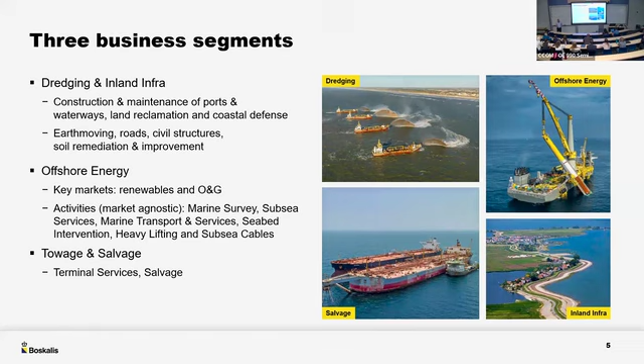2023 results give you an idea of the size: revenue about 4.3 billion, EBITDA about $1 billion. Net profit - dollars or euros? Those are euros, so multiply by 1.1 to get dollars. Net profit of about 600 million euros, so about 660 US dollars million. Net financial cash position - this is interesting - 500 million, so roughly almost 600 million net cash position. That's if you want to take over somebody, you have the money.

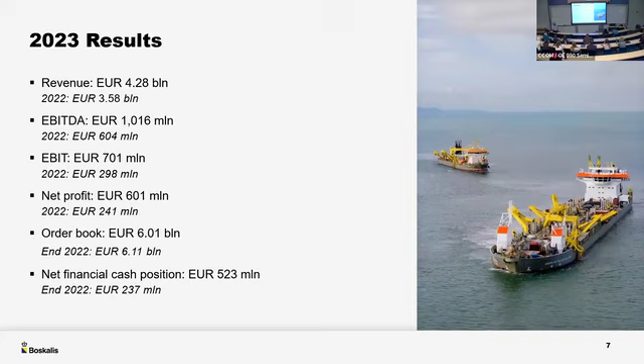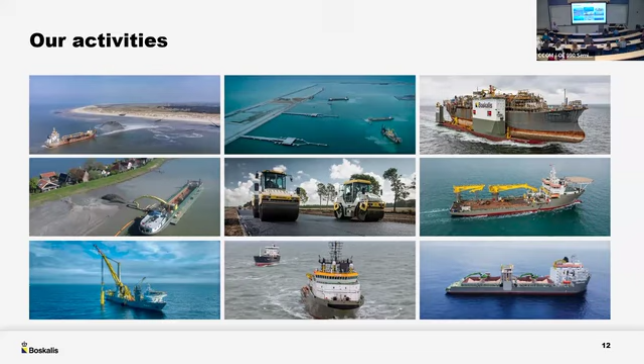Let's go a bit into the dredging action. Three of our vessels here.

It is a global capital intense business with a high barrier of entry, because a modern dredger vessel costs about $200 million, slightly under 200 million euros. So if any of you thought, well, I'd like to be in dredging, let me start a dredging company, you're going to have to build one of those vessels. That's a high threshold.

We construct maritime infrastructure, ports and waterways, climate adaptive solutions. There are pictures later of things we do in the Maldives. Land reclamation - obviously there is a shortage of land near the coastline. One of the projects we're currently doing is building a new airport in the sea in Manila. We've added something like 20% to the total territory of Singapore over the years, expanding the land into the sea. We've done a lot of reclamation in the Gulf, in the Emirates. And we do inland infrastructure, but that is mainly in the Netherlands.

But we have the ability, and occasionally we use that, if we develop a port somewhere and the people want a road to that port, we have the capability to also include the road in our bid. I haven't done any railroads yet.

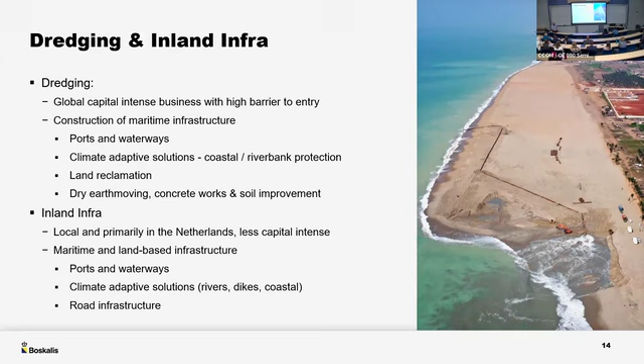Track record of selected projects: Manila International Airport, Gulhifalhu pictured below in the Maldives, where we are actually reclaiming land and heightening it, because sea level rise is a very bad idea if you live in the Maldives, where roughly the land is about 50 centimeters to 2 meters above the waterline. They are really worried.

We're currently building the Fehmarnbelt tunnel, a connection between Denmark and Germany. That tunnel is an immersed tunnel, 18 kilometers long. We're providing all the dredging works there to submerge that tunnel in a ditch. It's an interesting positioning challenge, because tolerance between two elements closing on each other is 25 millimeters at 40 meters of water depth. It's a bit challenging.

Singapore extensions are to come. We were the lead contractor when Egypt decided that the Suez Canal needed to be a two-lane instead of a one-lane connection. We did that, but we had to do it in one year. It was a challenge.

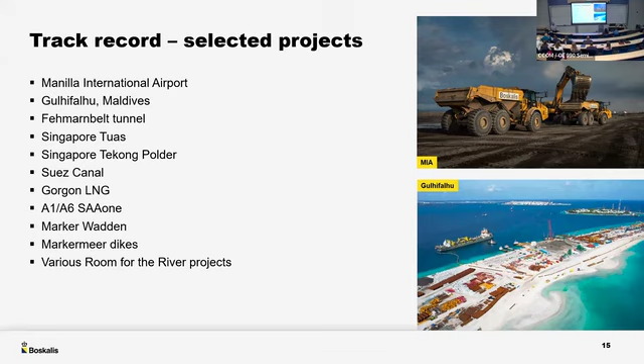And some other various projects, I won't go into too much detail. Here you see some pictures of the dikes we're reinforcing - that's work in the Netherlands. A large reclamation project in Singapore, that's what you see here. This is where the tunnel is going to go, and these are concrete factories that will build the tunnel elements. They build the elements, tow them out, submerge them, and connect them to each other. That way it's an 18 kilometer long connection.

I always had a question about this: when you build a tunnel like this, are those segments placed on top of the seafloor or buried beneath it? You dig a trench, put them in, then add a layer of rock so you have a solid foundation at a certain height. Then you lower them into the trench, fill up the sides, and put some cover on. So the overall seabed height stays close to what it was originally? Yeah, that's the idea.

Usually you build that through a shipping lane or something, and you don't want to reduce the navigable depth, so the end rock that's on there is even lower than the surrounding seabed - it's a pretty deep trench you have to make. That's a challenge because usually the current is going perpendicular to your trench trajectory. So you're making a trench and you don't want fluid mud in there, because you need to put rock on undisturbed soil for a sturdy foundation. Meanwhile all the sediment is being brought in - that's why you need to produce these elements quickly, because if it takes too long you'll get sediment buildup. Then if you try to lower the element onto the bed, there will be mud in between, and it'll keep moving. It's a challenging business.

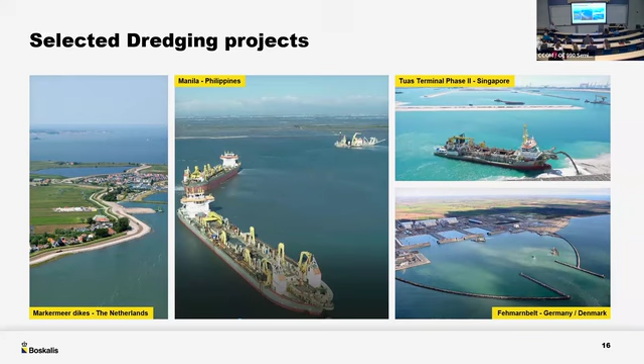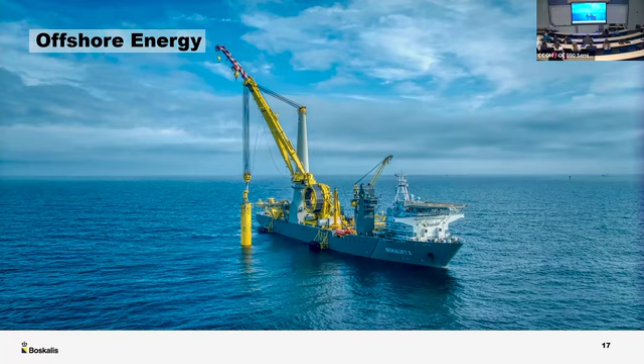Offshore energy. Here you can see a little bit better. That's the Bokalift 2, that's a large vessel. There is a slide on how we make that. That's interesting.

Markets and activities: key markets, renewables and oil and gas. All these assets we have are a mix of contracting and services, and it's market agnostic, so we can use those assets, those vessels, both for oil and gas and for renewable energy. That's why we always talk about an energy transition. It's a process that's going to take time, some people think it'll be finished by 2050, others think that's going to be very challenging to achieve. So there is a transition.

In between, you will still have to maintain oil and gas facilities, and oil and gas facilities will need to be built. But at the same time, you want to be able to install renewable energy. So our assets are geared to being workable, economically workable, in both segments, and we're pretty successful in that.

So we do a number of things: we do transport services, heavy lift, as you saw, the monopiles. Marine survey is what we call marine survey, geophysical, geotechnical - two of our subsidiaries do that, Horizon and Gardline, part of our group.

We install cables, subsea cables, so export cables to get power from an offshore wind farm to the shore, but also infield cables connecting the individual monopiles to a substation where it's combined and transported and then exported to shore.

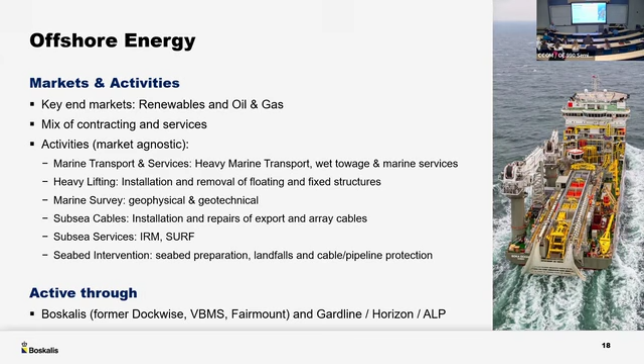We've been involved in over 130 wind farms. There's no other company in the world that can claim that - we're pretty proud of that. Lots of examples, other things we did, Aasta Hansteen, topside float over. I don't think there's a picture there.

When you first set up piles and then you float over a complete production platform, this is something we do. There's pictures of that. We install FPSOs, do the anchoring pattern, they call it the jewelry. Install that, but also if an FPSO is end of life, we will remove it. Also an activity we do.

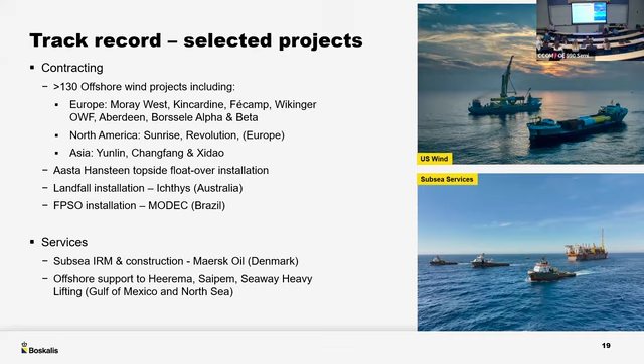And we do services, so that's all contracting. Services is subsea IRM maintenance, offshore service support to Heerema, Saipem, Seaway Heavy Lift, you name it. That is the support vessels.

Here's some projects. Electrification of a gas platform, that's a production platform that used to get its power from burning fossil fuel. The Dutch government didn't want that anymore, so we ran a cable from the shore to the platform so that they can make the platform electric power operated, so that they don't emit CO2 anymore. Although they still produce gas, their own emissions has gone to zero.

And we do subsea services. Park your boat against an existing platform installation. Send the divers down to do maintenance, to clean the legs, to check for damages. That sort of thing.

Salvage, very important. Very high PR value, because these things tend to be in the news. Some survey involvement, not much.

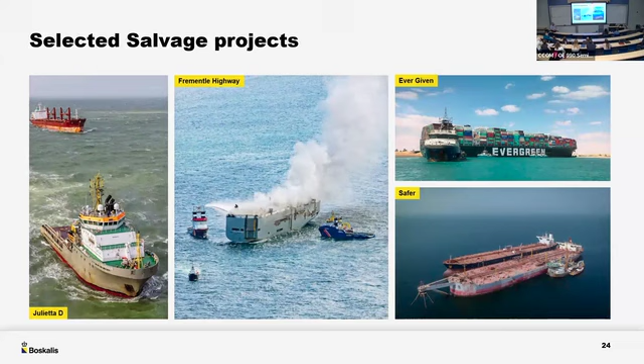So what drives this whole business? This is interesting to know. Population growth and increasing wealth are two givens. That's happening. There's no way to stop it and nobody can influence it.

What happens then? That leads to coastal urbanization. People want to live no more than, 80% of the people live within 50 miles of the shoreline.

There's growing world trade because people need stuff. They need food, they need water, they need refrigerators, they need air conditioning, they need Starlink internet. That has to be shipped there. People order stuff from AliExpress because if you order electric Christmas candles with batteries in them, it's cheaper if it's brought to your door than if you go to a local store and buy the batteries separately. So there is an immense amount of stuff being shipped around the world, and we create ports.

Energy demand is rising. No matter what people say, there are only a few places in the world where you can live without energy. Probably where we are now. If you did not have energy, you could not live here. You'd simply freeze.

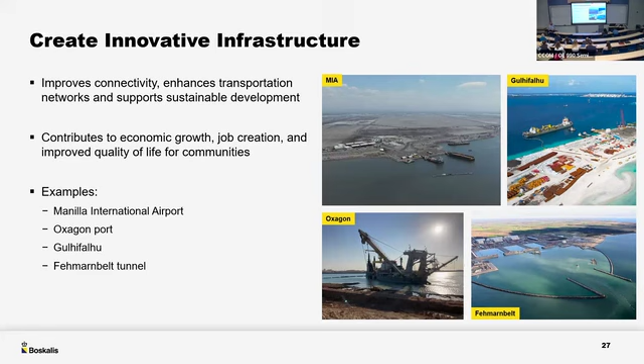What you see here is a hinge, called the upending hinge. You have this huge monopile, 10 meters in diameter, transported horizontally. So the crane picks it up from the deck and puts it in the upending hinge. Then you hold it by 2 points, release 1 point, and start upending it. It shouldn't fall down. So this whole contraption is there to support this enormous pipe to go straight.

So it stabilizes the monopile, 3,000 tons, holds it steady, and then slowly the crane will lower it onto the seafloor, because that's the critical point, when the monopile hits the seabed. If it's on an angle then, it'll keep going on that angle, so you won't get it straight.

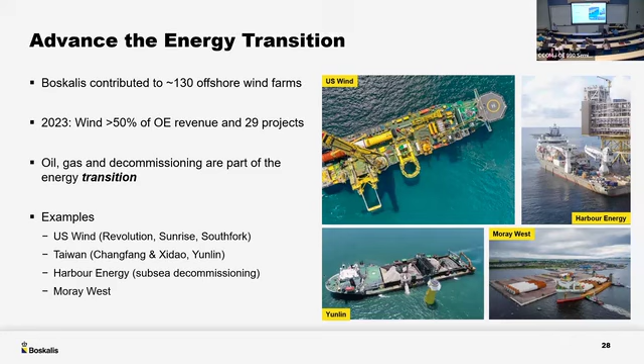How much do you guys do your own in-house research on improving technologies, like optimizing a ship, versus doing analysis and making contracts to bid out for the best possible things, as opposed to your own research? I can think of thousands of things where you'd have your own research process. Yeah, oh yeah, we have a research department, and we have what we call central fleet support.

I don't know where that is, but let me click through a bit. Why isn't this going on anymore? Oh. This is what we do.

This was an abandoned drilling vessel, the Jack Ryan. We bought that and we recycled it. It became the Bokalift 2. So we took an existing hull, got everything off, and then our own in-house engineering departments made that design.

We put some extra parts here on the side, you can see here, for extra buoyancy. Put the crane on and designed all those tools ourselves, so a hell of a lot of research went into that. And we made from that vessel, which was dirt cheap because it was destined to be scrapped, a state-of-the-art wind farm installation vessel.

Two main advantages. One, it's cheap because the hull already exists - you use a lot less steel, and steel at the moment is a premium. The second is time to market, because if you start from scratch and build a vessel like that, it takes 4 years; the conversion only took 2. So we have the vessel available quicker, and it's ecologically very friendly because you reuse stuff rather than build new.

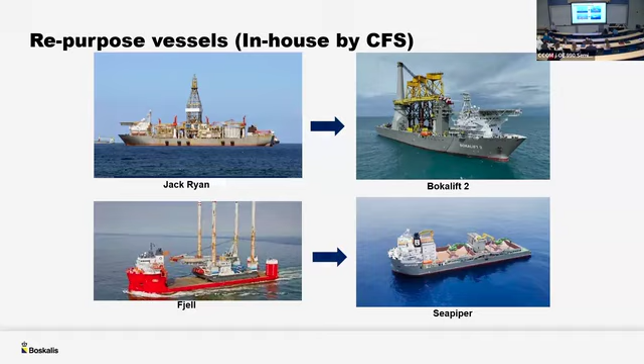Okay, we talked about this. We talked a little bit about human excellence. It is about internal mobility, diversity and inclusion, using everybody that is available in the world because there is a shortage of capable people. And not just getting them in, but also keeping them, developing these people. It is about people.

We invest a lot. We used to be on the stock market exchange. You could buy part of us. A Dutch investment fund, HAL, which is the Holland America line, which is not the cruise line, but the previous owner of the cruise line, and they sold the cruise line. They've been our majority shareholder for something like 30 years, and they decided to take us completely off the stock market.

And they sanction our investments. We were planning to invest in 3 years, 1.25 billion. In 2 years, we were at 1.15, and we're going to spend another 600. And they fully agree. The only thing they say is, do you need more money? It's a pretty good owner that has us, and they have plenty of money. They want to do something useful.

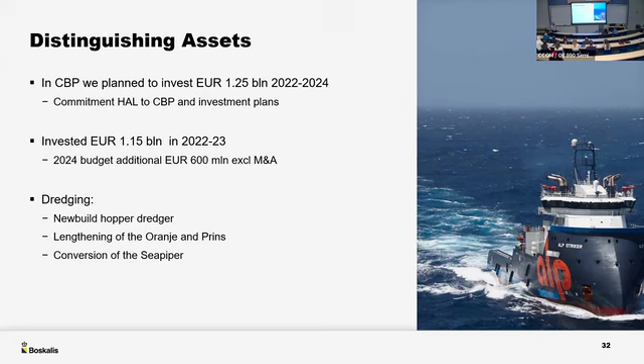Well, we talked about this. A little bit about good stewardship. It's corporate driven, responsibility lies with the board. But there's also things like safety, carbon emissions, that's typically something the board decides on. But on projects, we apply good stewardship. It means biodiversity, ecosystems, because that's a direct interaction with projects. Social and community impact. Emissions is an increasingly important topic.

Touch on it just a little bit. You've probably heard about scope 1, 2, and 3. Well, we can deal with scope 1. This is direct emissions. You can imagine there is at the moment no substitute for diesel engines, so 99% of our CO2 output is generated by the fuel of the vessels. But it's in our control. Scope 2 is our indirect emissions from purchased electricity, the offices, that sort of thing. That's also in our control. We have solar panels on every single building. We have 255 electrical car charging points at the parking facility.

Scope 1, scope 3 is more difficult. It's your suppliers and it's your client usage. Now we can influence what we buy. If we buy asphalt or steel, then we can influence that and try to minimize it as much as possible. Client usage is a different thing. The environmentalists are trying to push us to say, well, you can do something about it. But if the Philippine government wants an airport, it's a bit difficult to say, okay, Boskalis, you're going to be responsible for all the CO2 emitted from the use of that airport. If we build a road, it's even more clear.

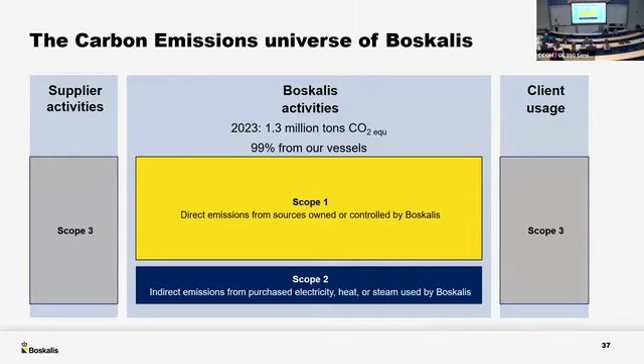If that road is used solely by electrical cars, there is no emission. But if it's driven by diesel owners, then it's different. So for now, we don't really have an answer to scope 3. We're trying to decarbonize the maritime industry, but we don't make diesel engines. There is no real alternative yet. We're investigating, but it's not there yet. And if there is an alternative like LNG, hydrogen, whatever, then that has to be available globally. So there are difficulties there, but we're working on it.

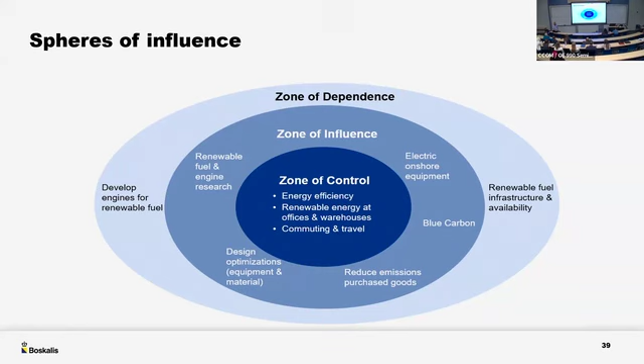It's basically 3 zones: zone of control, something we can do something about; zone of influence, where we can try to influence others to, and subsidize them in a certain way to make the cleaner choice. And then there's the zone of dependence, like we don't invent engines. We're looking into nuclear, but it's difficult. But it might be an option, especially for things we do that require immense amounts of energy. So we're looking into that.

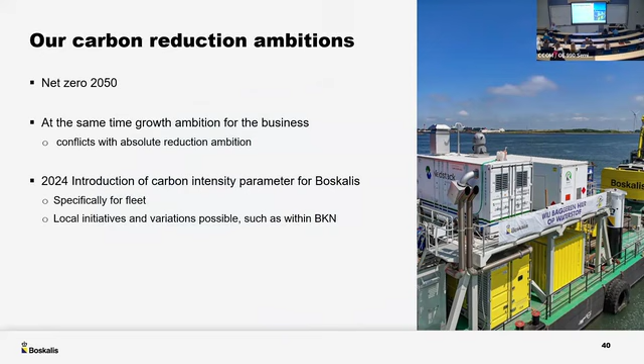Our carbon reduction ambitions, net zero 2050, depending on others as well. We have a parameter and we want to reduce our emissions by 10% by 2030. That is our relative emission, because we also want to grow as a company. So it's not the absolute, it's an index.

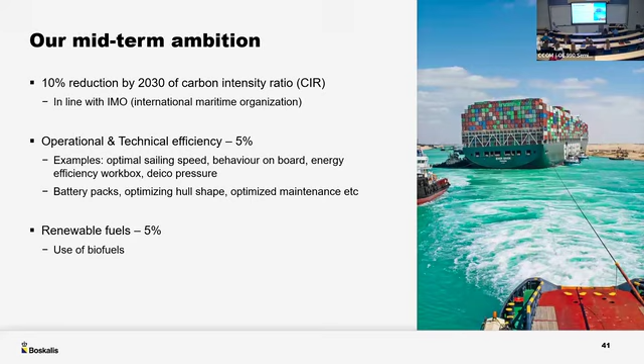5% has to come from operational efficiency, and 5% from using biofuels. We think we can achieve a reduction by 2030. We're working on that, although people see us as the great polluter - we're doing whatever we can to stop that. As you can see here, that net zero excludes

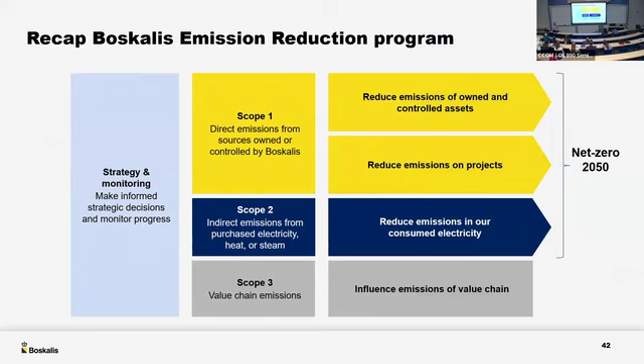scope 3. If your business is building airfields,

We've got battery packs on our dive support vessels, because if you use battery packs, the propulsion is diesel electric. If you're on DP, especially in high seas, we can now take 2 of the 4 diesels offline and run it through the battery because of the peak performance that the DP has to give, and that can be compensated by the battery. Saves a hell of a lot of fuel.

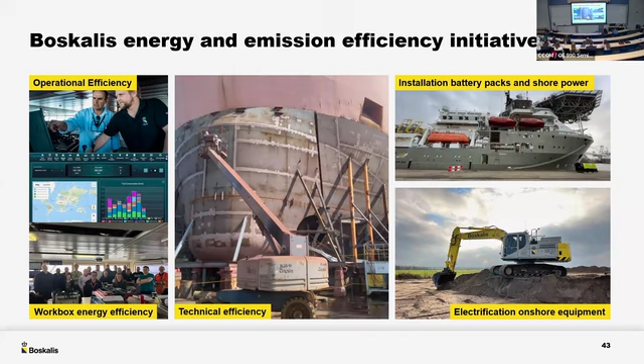We have electrification of onshore equipment because there it's easy - simply run a cable. Preparing for the future, all-electric dredger. We are building a dredger at the moment, a big one, that can use methanol. We do have hydrogen power - we are experimenting.

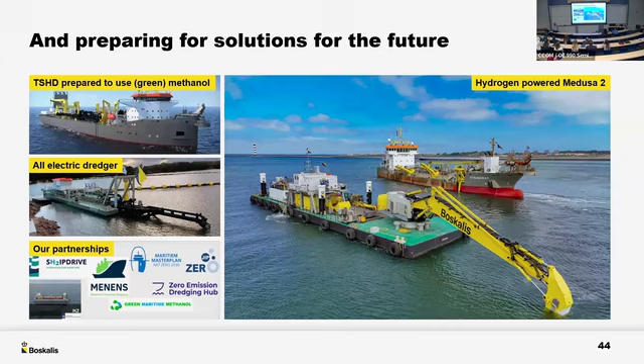Biodiversity - we're part of EcoShape, which is trying to do what we call building with nature. So if you're disturbing the soil, make something out of it that is a better habitat than it was before. We're trying to do that, and we succeed in mangroves, in placing artificial reefs, that sort of thing.

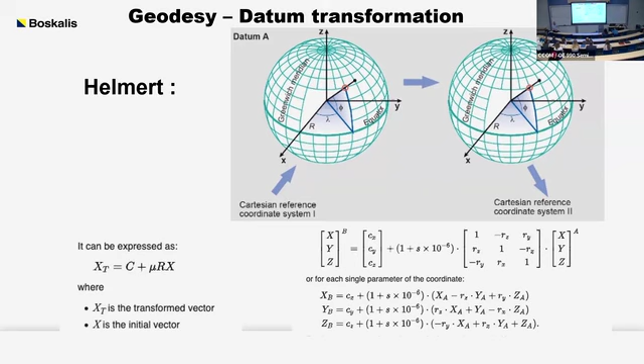Now we try to work with GNSS. Every country has its own system, so you have to transform it, and you have to check and double check and recheck again. To give you an idea, every single British port has different datum transformation parameters from ITRF 89 to OSGB - they're adjusted per port, it's not something national. So this is important - geodesy is important. It's important to avoid that.

That's a nice anecdote - this Fehmarnbelt tunnel is 18 kilometers long. In the beginning, the client thought, well, let's split this scope into 3 parts. So we have a scope that makes the trench, then a south contractor and a north contractor, and they're both going to build 9 kilometers of tunnel. They're going to meet in the middle with a 25 millimeter vertical accuracy.

Just before they handed out those contracts, they decided it might not be a good idea to try and have that connection 9 kilometers offshore, 40 meters down, and expect to be within the 25 millimeters. We said, why don't you flex the 25 millimeter? Well, they couldn't, because the whole tunnel has roads but also a railroad, and the train with the electrical wires on top need that space. If they were to relax the tolerances, they would have to build the tunnel higher, and the cost in additional concrete and rebar would be immense - they wouldn't be able to bear it.

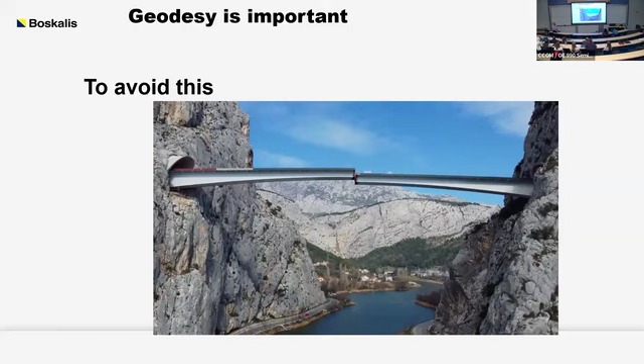That's why you need a survey department. That's what we deal with every day. Very high accuracies. And not a lot of people realize this. You lot will.

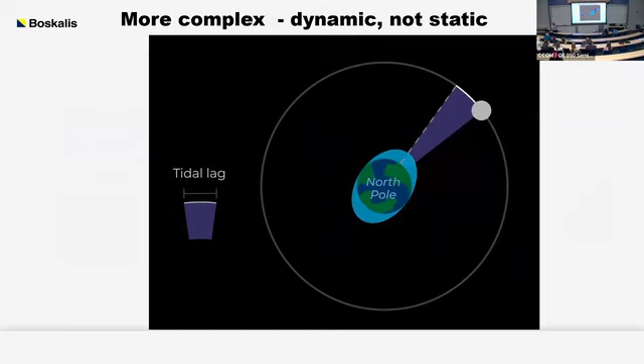That water level isn't static, is it? You have something called tide. It moves all the ways. It's weather dependent, it's dependent on the moon, it's dependent on anything. It's dynamic. Even the sea floor is dynamic.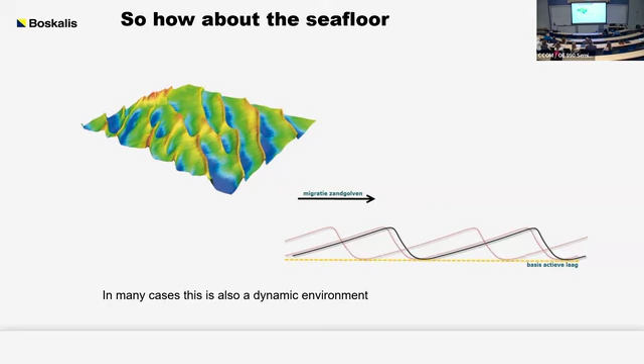The contract volume is 100 million cubic meters of sand that we have to bring. And we calculate everything in cubic meters of sand, because we know the wear and tear of a cubic meter of sand. We know how much fuel we need to spend. We know how many cubic meters of sand per hour we can produce.

1 centimeter vertical difference over that area equals to 175,000 - that's supposed to be cubic meters, at $10 a cubic meter. Anyway, a centimeter is 1.7 million in cost.

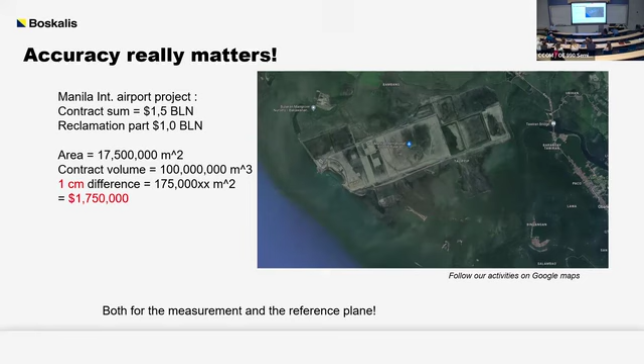But what is also important is the reference plane. Installing a monopile requirement - this is not something I made up. Install the flange height 10.5 meters above LAT with a tolerance of plus or minus 10 centimeters. Now that's fun, huh?

The question is, how accurate do we know LAT somewhere offshore? Do you know how long it takes to determine LAT somewhere offshore doing measurements? 19 years. So if nobody had put a tide gauge there for 19 years, that is a ridiculous demand because the reference isn't there.

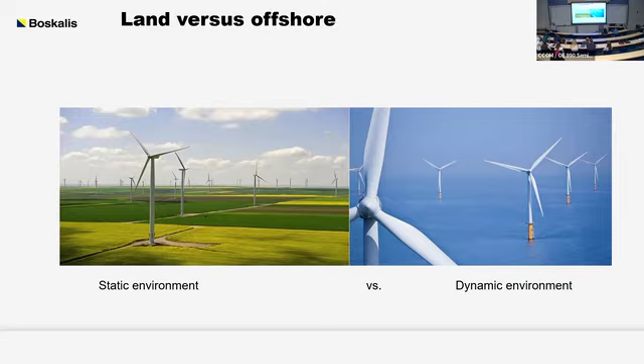And that demand, of course, comes from people who originate from that static environment, because that's where the electricity companies start. They haven't got a clue. And that's why we, as hydrographers, ocean scientists, ocean engineers, are so important - because we understand that dynamic. And that dynamic tells us that this is bullshit. There is no other word for it. We'll sign the contract and we'll build it, but it's ridiculous.

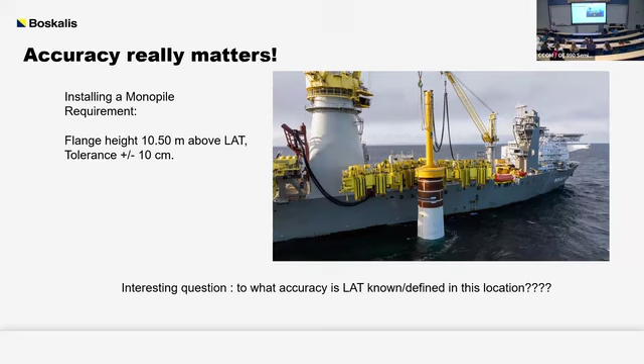So choose your reference. The sea surface as a water level is not a good reference because it moves. The relationship between positioning and reference level shall be mathematically defined and exact so that you can calculate one datum to another. There's lots of issues on lots of projects where those transformations and the mathematical relations are not clear, simply because the local government doesn't know.

Multiple measurements over time shall be comparable. The reference level shall be fixed in time, at least for the duration of the project. That's not the case everywhere either.

The seafloor itself was often used in oil and gas as a reference level. And if you're in deep water, who cares? Everything's relative. In deeper water, below 50, 60 meters, you hardly see any moving sea bottom by ripples or that sort of thing. That's all dampened out, so you could use that.

But as we go away from fossil fuel and into this energy transition, we tend to install monopiles, jackets fixed to the seafloor. So you come shallower, and that seafloor usually is moving, so you can't use the seafloor anymore. A major problem here is depth of burial of cables, because they want it at a certain depth, in a certain layer, because of the heat emitted from the cable. If it's in the wrong layer, the cable may overheat.

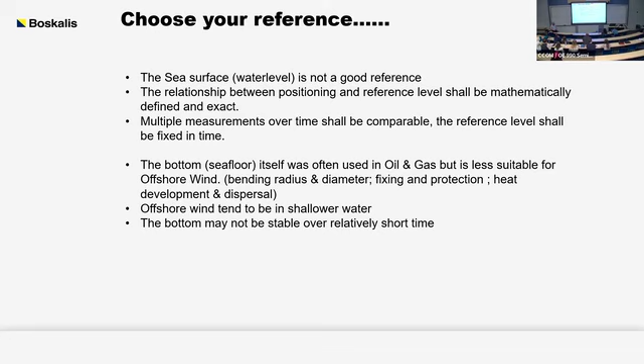But related to what? Reference levels are very important to assess what you're doing and to get it done right. The bottom may not be stable over a relatively short time. All in all, difficult.

Well, what do we provide as a department? We provide knowledge through an operations desk. We provide personnel - I have 200 surveyors working for me worldwide. And we provide survey equipment to support the projects.

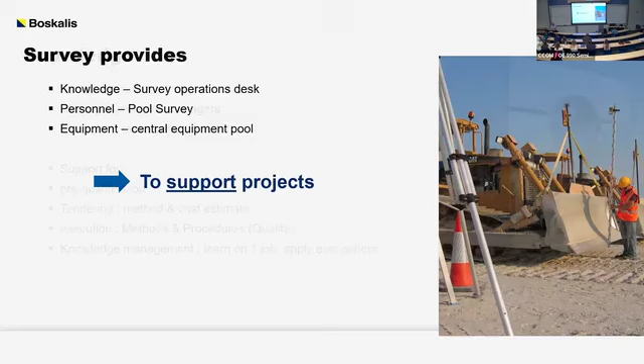Operations desk, operations managers, HR managers to deal with people, support for pre-qualification - very important. Tendering, what method are we going to use, which is going to cost. Execution, methods, procedures, quality.

Knowledge management, I've seen it here somewhere else - they said map once, use multiple times. We have learn on one job, apply everywhere.

Personnel: about 195 surveyors worldwide in the international pool, plus 33 in the Netherlands market, plus 7 in the UK market, plus 12 office staff. 100 international projects, 70% non-Dutch.

This was very different 20 years ago. All sorts of nationalities from anywhere.

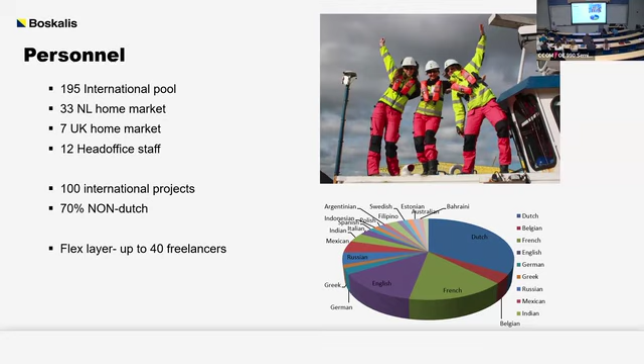That's a good picture, that's in Sweden. That project was run with the first project, all female survey team - no guys. That was a first. There's not a lot of women working in the marine construction industry, so this was something we were very proud of.

Some equipment - see your basement. This is my basement. It's not a basement, it's 2 floors of a large production hall. And those are mainly empty boxes, thank God, because the equipment that's supposed to be in the boxes is out there in the field.

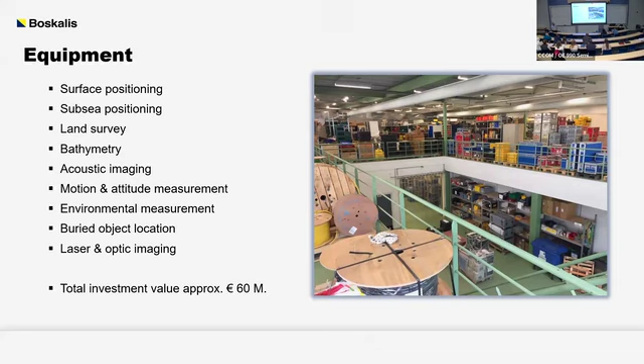We've got about 60 million euros invested in survey equipment, just for internal use.

What do we do? Bathymetry, this is our bread and butter. We've got one of those, we showed you one of those, we have one. This is what we do mostly, especially for dredging, because measuring where the bottom is - as I said earlier, once a day, twice a day, very short turnaround. Keep them fed with accurate information so that they can work efficiently.

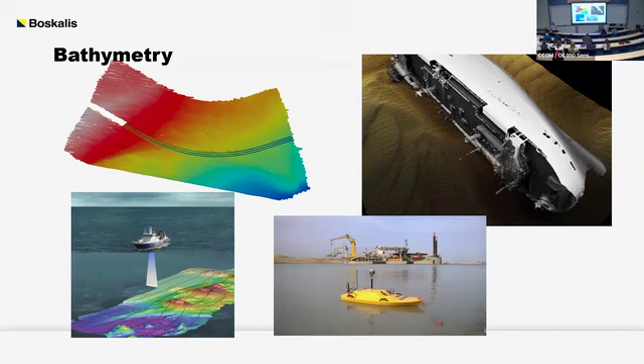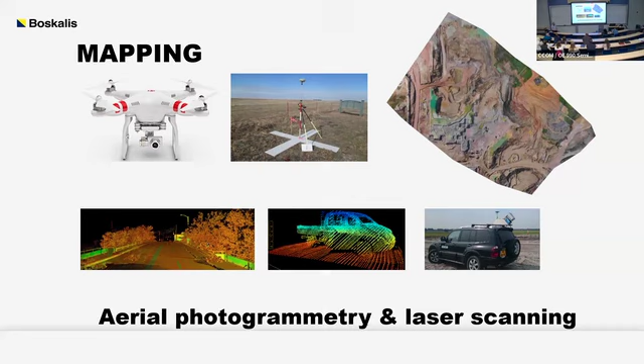We do mapping, we do laser scanners on cars, we use drones. There's an incredible amount of difficulty legislation-wise.

That's what we do, surface positioning, very accurately. Doesn't have to be absolutely accurate, but relatively it has to be very accurate, because we don't want to have the barge, the vessel that brings in the load, touch the pre-installed cones.

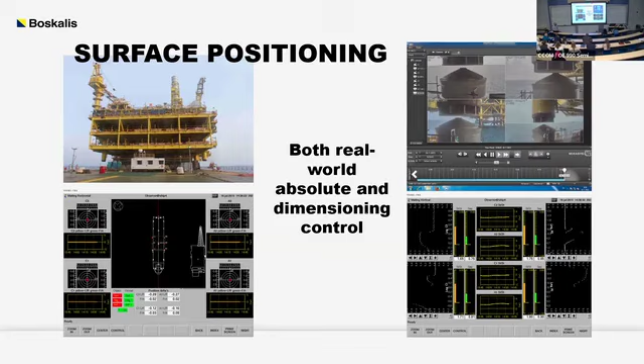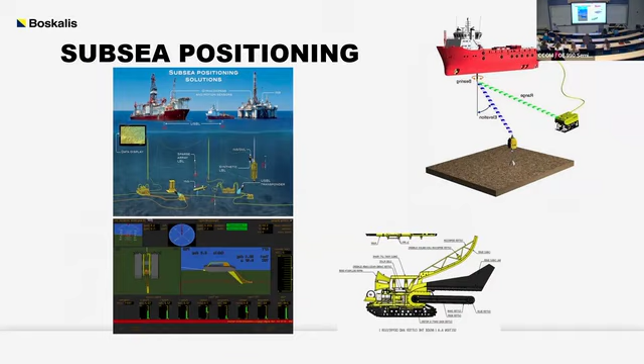Subsea positioning, we do that too. That's a picture down there of a trencher that's burying a cable. Obviously USBL stuff, positioning, ROVs.

Environmental monitoring: mobile monitoring detecting sediment plumes around where we work. We deploy buoys to make sure certain levels are not passed, so that if we're working close to a coral reef or something, we don't completely make the water turbid and cause the coral reef to die off.

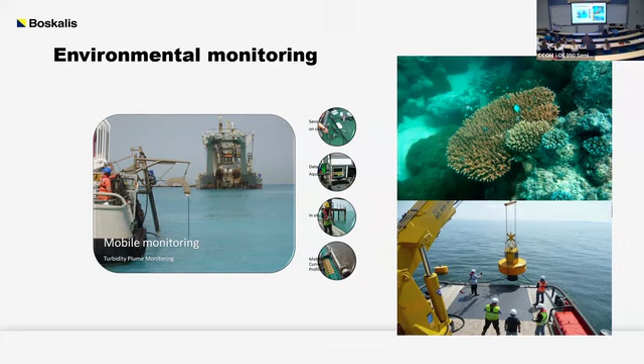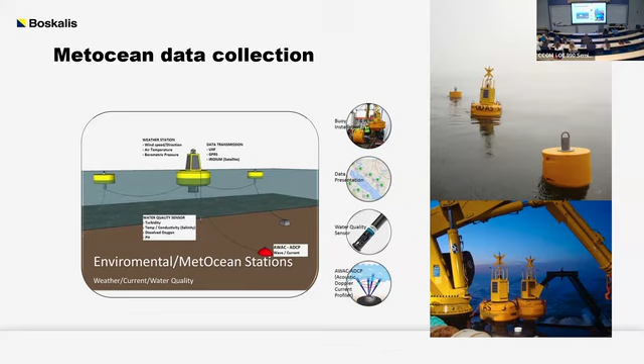We've developed those buoys to collect metocean data for our workability, because there's a limit to when a vessel can work. So we'll deploy the buoys and operate them.

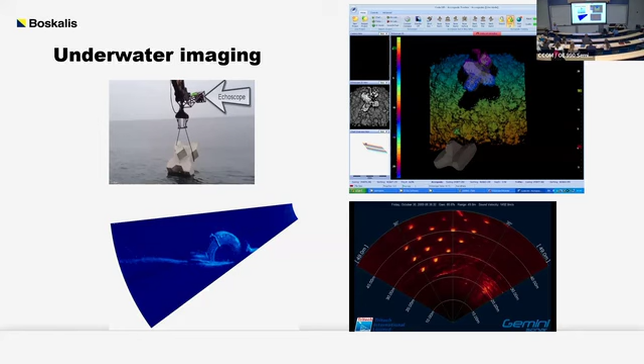Side-scan sonar imaging we do occasionally, not very often. Did you see the drag marks, especially this? This is the leg of a jacket rig that needed to be removed. The jacket rig obviously fell, and we had to get it out. That's when we occasionally use side scans - don't use it a lot.

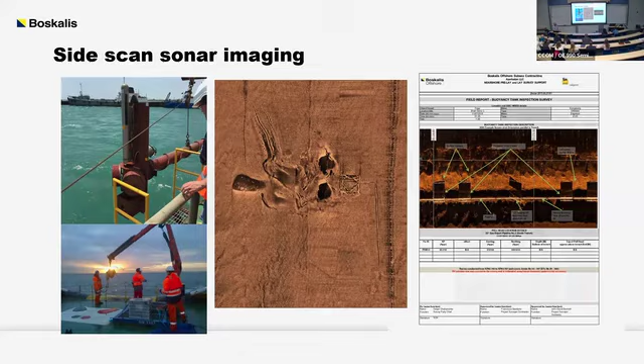Some sub-bottom exploration. This is mainly for salvage, where we need to find if an area has been cleaned, whether all the metal has been taken out. So we'll occasionally look into the sub-bottom. We have some sub-bottom simulations, but it's not very often.

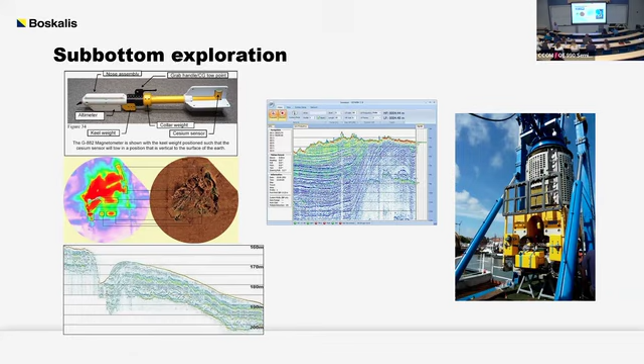European waters are riddled with ammunition dumps from World War II, but also lots of unexploded torpedoes are lying around, especially in the Baltics. We have a daughter company that clears that.

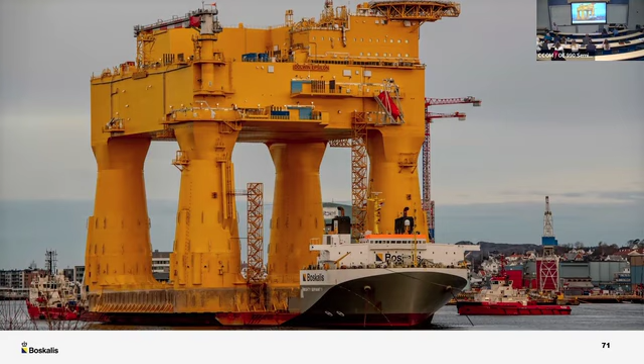This is the substation, the neighborhood substation I was talking about. That gets put on the seafloor, and we need to lay the foundation for that, but we also do the transport. It's slightly bigger than the one you'll find in your local neighborhood, and it distributes the power.